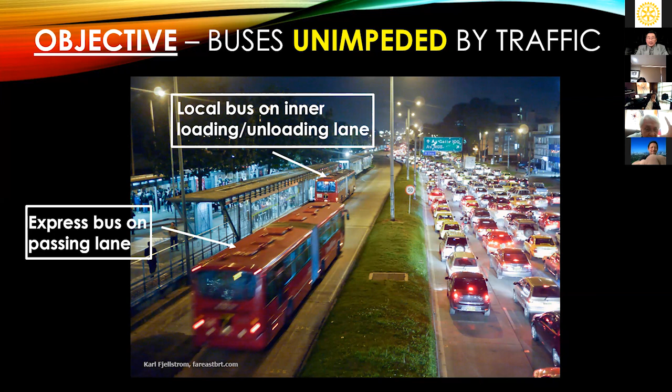Well, I guess this is the sentiment of many of us in this situation. But that is the status quo ante, because look at this picture. It shows the problem. At the same time, the solution is there. The solution has been staring at our face for what? 20 years since the MRT was constructed. It shows that a dedicated transit way will be efficient, with the conveyance running despite the fact that on both sides the roads are clogged. So that is the solution.

And here I wrote last May 10, I said, don't waste a crisis. I said that this time, wherein we are in lockdown, is a good time to introduce a new transportation system on EDSA because passenger demand is practically non-existent.

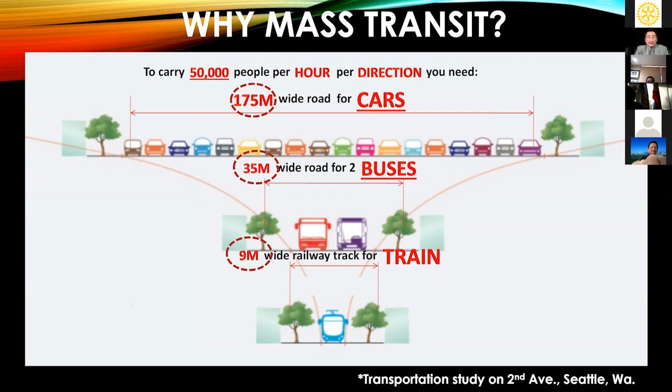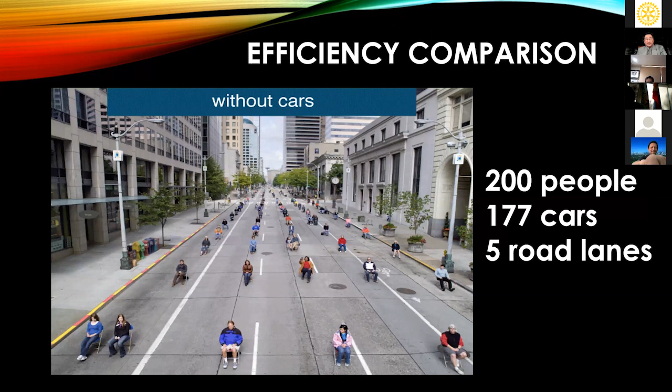Now, so what are these solutions? I mentioned this, that it's important for us to realize that we need to right-size the bus fleet. And that can be achieved by franchise rationalization, route restructuring, and accreditation of qualified operators. And I'm glad to mention that the LTFRB, the agency in charge of this, has been working on this. And I know for a fact that since June 2017, they already had the structure of these reforms.

But I know that everybody is impatient, but we must realize that they are dealing with problems over the decades. Over about 30 years, so many franchises were issued. Now, they have to sort this out. And it's not overnight that you can do this. And then you need the cooperation of the operators because they're holding franchises. Now, I'm glad to tell you that the operators are cooperating with the LTFRB and the DOTr in this regard.

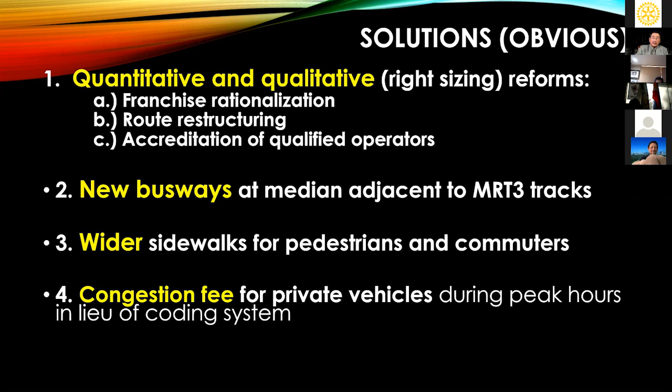Okay, now on August 26, 2015, after the 8-hour Carmageddon, wherein so many people were stranded, I prepared a position paper. And among the recommendations there is a so-called EDSA Dream Plan, which calls for the busway to be shifted to the innermost lane. So look at the center circle. That is where the busway should be.

Now, this will conform to the universal standard of a dedicated busway, there at the innermost lane, not at the curbside or outer lane where the yellow bus lane was for decades and decades, and we did not make the necessary changes. We tolerated that, and it was ineffective. Okay, next.

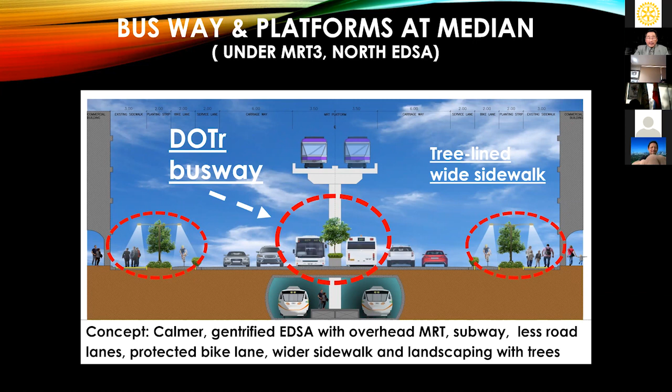Okay, this is a rendering that I requested the architecture firm of Porch Peña to do. Because our buses are equipped with doors at the right side, by necessity the passenger platforms will have to be at the starboard side, or the right side of the buses, okay?

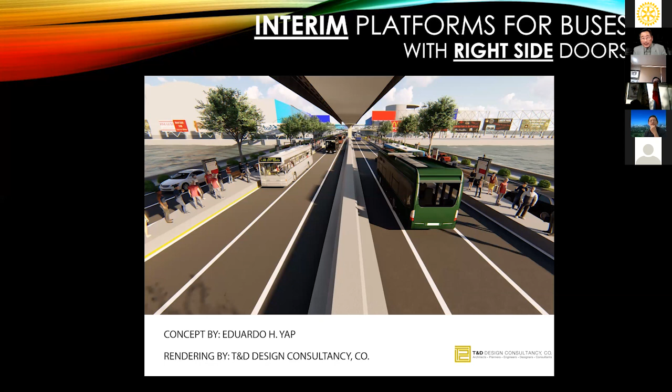Now, this should be a temporary measure. If ever this will be resorted to, it should be temporary because those two platforms will take up 2 car lanes, and it will constrict the lanes in EDSA from 5, only 4 will be left. So if 2 will be taken up by the busway, only 2 lanes will be left for cars. That is not enough.

Okay, now this is how it should be. Again, this rendering was made, if you look at the bottom, I requested Porch Peña to kindly prepare this rendering to present my concept of how the new platform should be. In very simple terms, at the center, it's actually just like a raised sidewalk so that passengers, commuters, can take the bus on the left and at the right side.

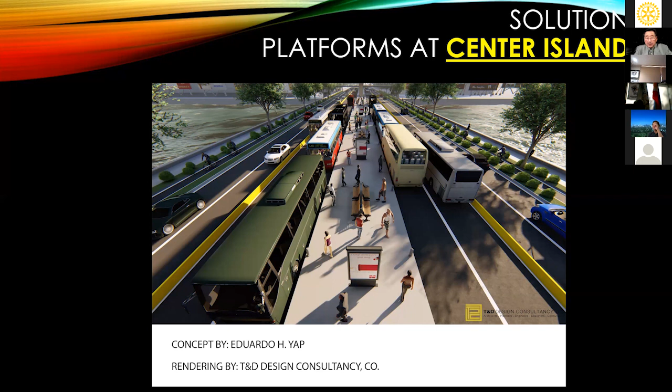But this one will require the buses to be retrofitted with doors at the left side instead of the right. Now, this will take time, but this has to be done, and preferably before the busy Christmas season.

Now, we need air bridges for passengers to get from the sidewalk to the center island where the platforms will be. Since this again will take time and we don't have time, what will happen is that the MRT facilities will be dual purpose. But this is not an ideal solution, because we know that they are very crowded and congested. So if you're going to add bus passengers as well, there just is not enough space. And then with the need for social distancing, it will be very challenging.

Another problem is that bus passengers, when they go to the concourse of the MRT stations, will enter the platform where the rail tracks are. So there will be a mingling of MRT and bus passengers inside, okay? Then from there, the bus passengers will have to walk along the narrow platform beside the rail tracks to go down to the emergency stairs leading to the center island.

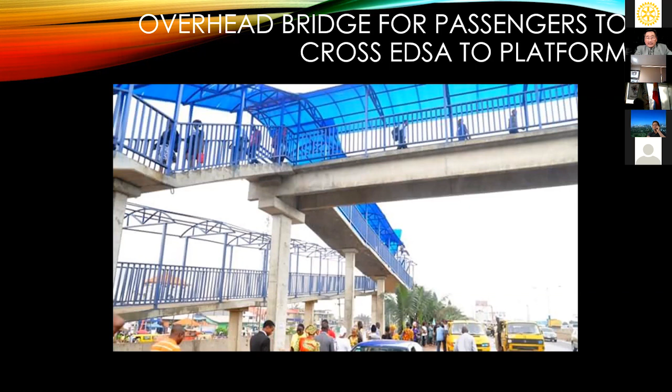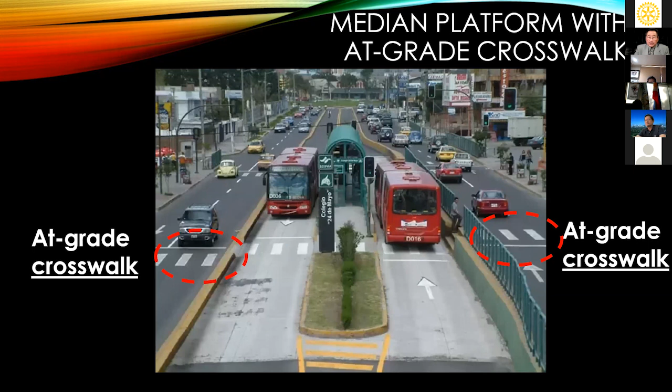For so many years, we have to realize that EDSA is no longer a highway, for the simple reason that the authorities allowed large mixed-use, high-density establishments to be built along EDSA, and did not require service roads in front as they should. So EDSA is more of an avenue, okay? To the extent that pedestrian lanes or passenger crosswalks should maybe be allowed, okay?

Next, okay. So what are the operating features that are required to make these busways efficient? The buses must be operated by mimicking the features of a train, okay? Not as now, where either they bunch together or they go individually. There should be no overloading of the busway beyond its capacity. Headway must be designated as appropriate.

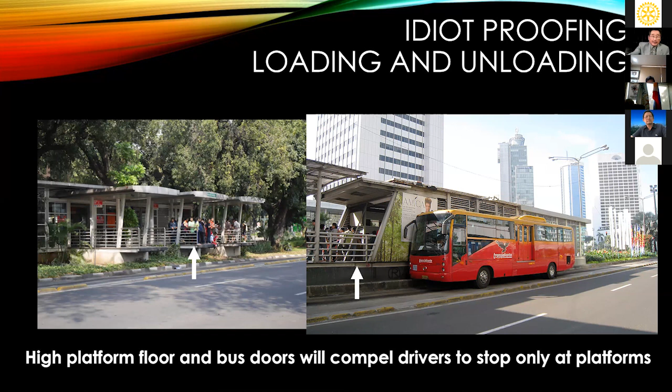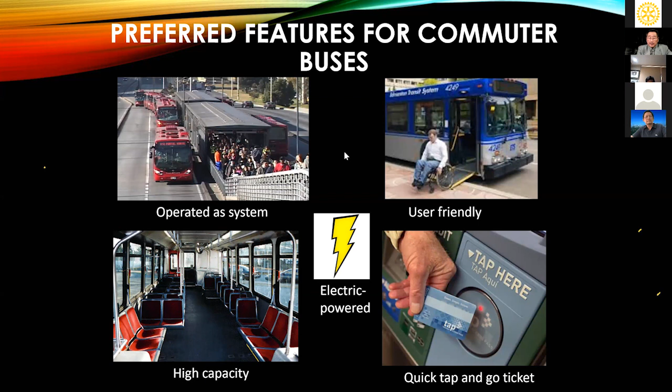Okay, so if I may repeat again, this is the last slide. I said that don't waste a crisis. Use this situation now wherein passenger demand is still below normal in order to pilot test this new system. And I said that don't aspire for perfection because people have the tendency to look for holes, to look for flaws in a new system. Now, we have to look at the total picture. If we aspire for perfection, what will happen is that there will be no progress. Nothing can move forward. And that is an excuse for non-action or for policy paralysis.

Now, I hope that everybody will keep that in mind. So when we analyze, when we study, when we evaluate this new system being introduced, let's be positive about it. Let's be constructive about it. We look for solutions. We suggest the how, not the what. You know, I tell you, our government people, they know the whats. It is the how that they need from us. So let's offer solutions. Let us not offer criticism.